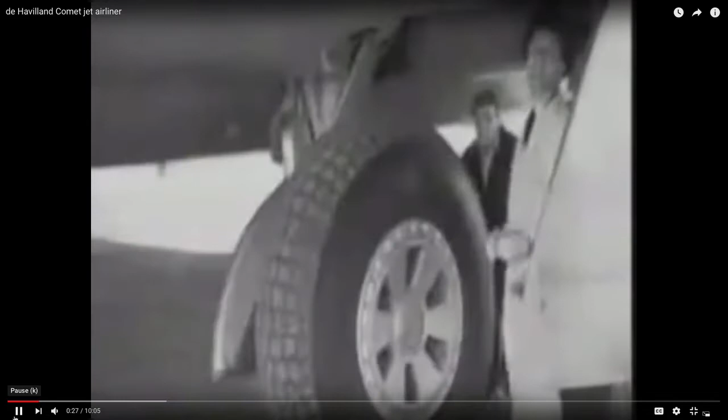Tails up for Britain.

With a comet scheduled by British Overseas Airways Corporation to start the world's first jet passenger air service, Pathé News detailed cameraman Sid Baines to cover the historic trip. This is his story.

A few minutes ago, I boarded the comet, together with other passengers making the trip to Johannesburg. Captain Philip Brentnell took us off, with Flying Officer Charbois, known to everybody as Charlie Boy, as co-pilot.

Up to 40,000 feet we shot, to reach the comet's best operating height, and headed for Rome, our first scheduled stop. Then I began to realize what a wonderful ship this was. Like all newsreel cameramen, flying is no novelty to me, but this was something new. There just wasn't any vibration.

Before I'd really settled down, we were flying over the Alps. I think I got a shot of the Matterhorn over there. Skipper Brentnell pointed out Corsica, that large mass of land 70 miles away.

At our great flying speed, we were soon on the last few miles to Rome. In a few minutes, Peter Panario was asking permission to land. We were over Rome. There was an hour's refueling break scheduled.

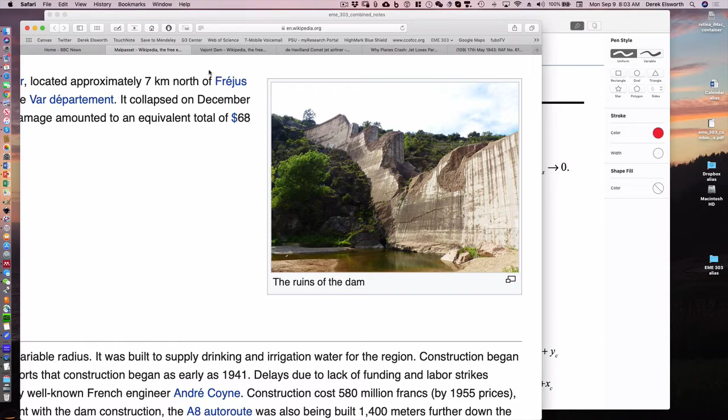We talked last time also about the Malpasset Dam, about pressures behind a thin structure, not unlike the thin structure of an airplane shell, that when it was filled, it moved the abutments and the dam itself broke. And I mentioned, but not in great detail, another event that occurred a few years later in the early 1960s, the Vaiont Dam in the Italian Alps.

Still stands there today, completely intact, but in that particular case, a rainstorm—there was a landslide that was sitting above the dam, and over time, with rainfall, the water level rose within the slope, and the slope slid into the dam.

So like pouring a bunch of rocks, putting a brick into a bucket of water, the contents of the dam flew over the top of the dam, and there was enough volume to displace the fluid that it flooded the valley and killed a thousand or so, a few thousand people as it went down there.

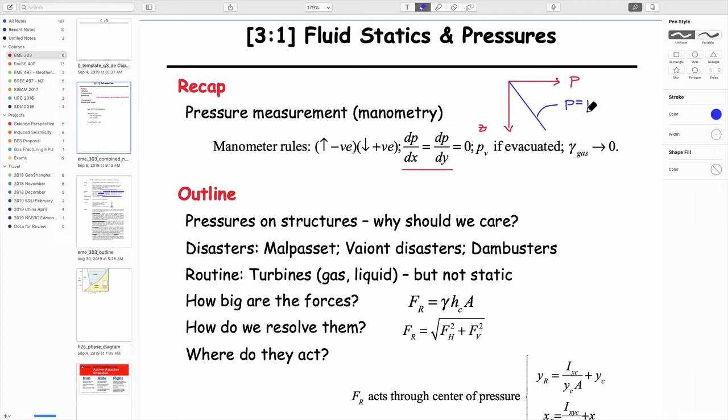We've been talking about pressures at a point, and the main rules we've applied so far come from the idea that in our coordinate system, with pressures and locations, depending on whether we have a liquid, we get something that looks like pressure equals some expression like this. And if it's a compressible fluid, it might look different, it won't be straight.

So it might look alternatively like something like this. The point is that if you look at the shape of this curve, both curves, it's true at any point that the change in pressure with elevation equals, using the sign convention with negative z downwards and positive z upwards, the pressure distribution always conforms to this at a point. But depending on how the density varies along the length, for a liquid it might look like this, and for gas, which is compressible, it isn't necessarily a straight line.

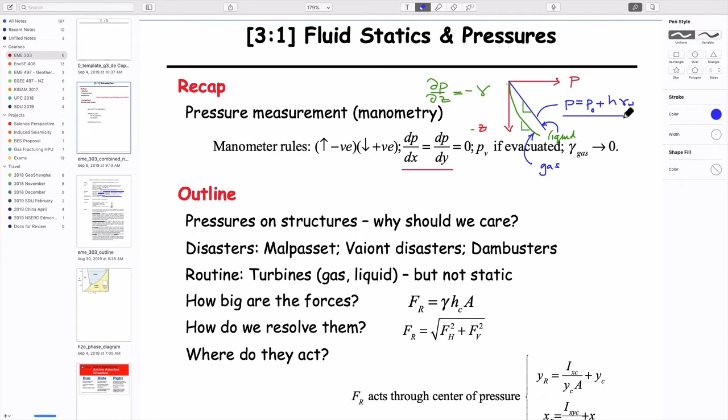So we can use this expression, the one we really use to look at the behaviors today. But what we want to do is look at pressures actually applied on a structure. The things we'd want to understand are how big those forces are, how we resolve them from multiple forces into some useful force that tells us something about how they might behave. So we're interested in how big the forces are, where they act particularly, and the third thing, which isn't on here but I'll add, is what is the failure mode.

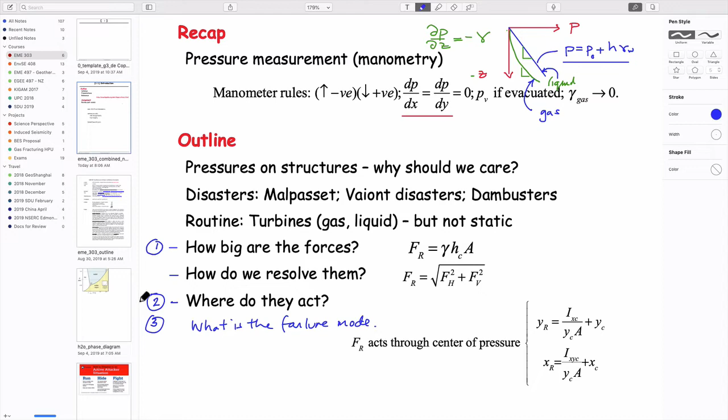Which will become clear soon enough. How do we use it to say whether the dam will topple over or not? Is there a way to do it? These are three separate things we'd like to be able to do.

So maybe to illustrate it, it'll be useful to look at this example of the comet and what that might look like. Let me do that. Whoops, see if I can move that. Does it move? No, it doesn't move. Fine, I'll just go back to doing my usual thing. So if we take the example we just looked at, where we have inside this, don't want that, thank you, go away. Is that what I need to do now? I guess that's what I need to do, isn't it? It gets very complicated when things don't quite work out the way you want.

So we have this aircraft fuselage, which has inside it a cabin pressure, and outside it has atmospheric pressure. We said before what we think these are: cabin pressure should be something like 100 kPa. We also looked at the change in pressure as you go up in the column, at 10,000 meters the pressure was something like 20 kPa. I think we did that last week.

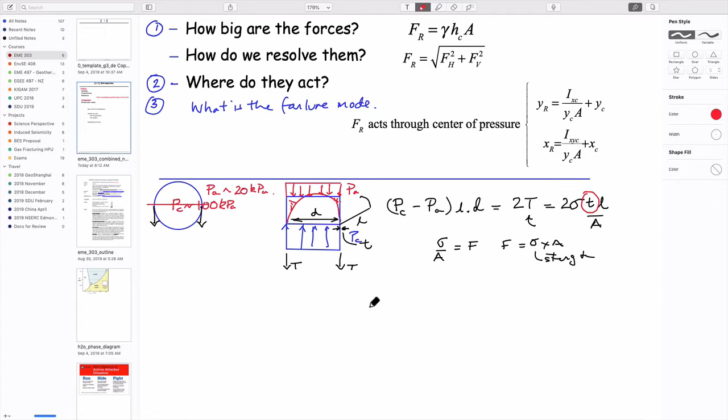So now we have enough to solve it. We could figure out, for instance, if you're designing something, what thickness aluminum you'd want to apply. So if we rearrange this for the things we know - length, diameter - and divide both sides by 2 times the strength times the length, that should be equal to thickness.

If we put some numbers in for what we know, writing in longhand: 100 minus 20, times 10 to the 3 newtons per meter squared, because these are kilopascals. The lengths cancel out. The diameter is equal to, say, 10 meters. Divide through by 2 times the strength of aluminum, which is about 200 megapascals.

So if that's right, and if we look at what these are, then the thickness we need works out. This is newtons per meter squared as well, in terms of length. So this is the same as 80 times 10, which is 800 times 10 to the 3, over 200 - I missed out a 2 - 400 times 10 to the 6, and it's meters. So T is something like 2 millimeters, or 2 times 10 to the minus 3 meters.

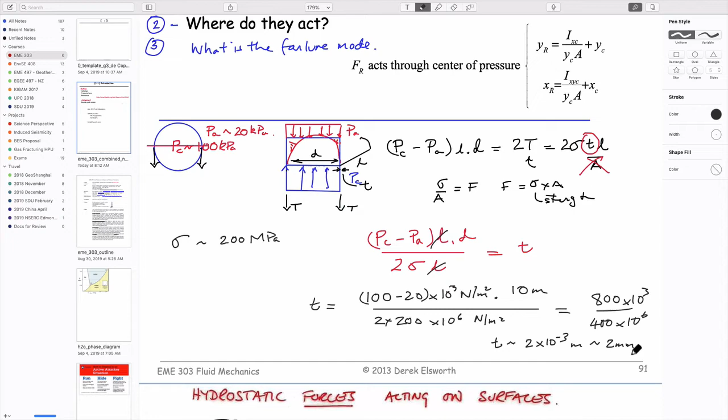Sounds about right - sounds like a reasonable thickness for a skin on an aircraft. You know it's not a meter thick, and you know it's not the thickness of tin foil, so 2 millimeters is about right.

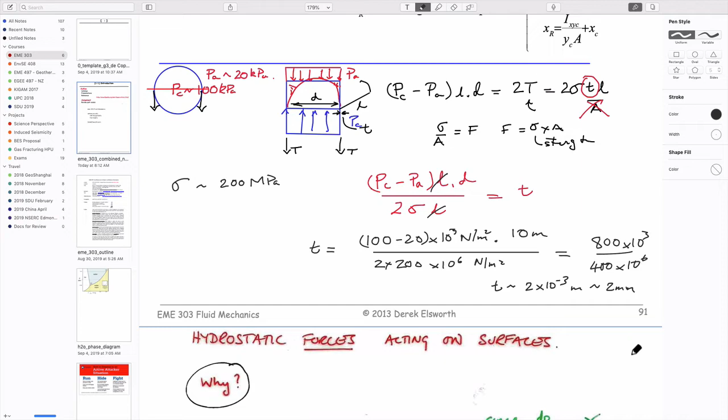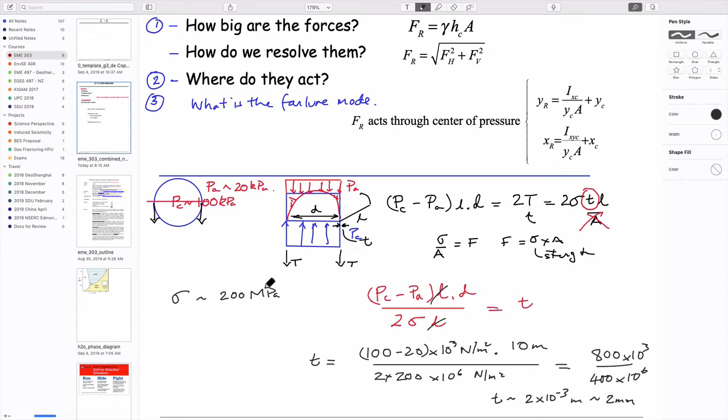So we've done some of the things we talked about. We said we'd do 3 things: how big are the forces? We've defined forces here by multiplying pressures over areas, very simply. We haven't figured out where they act, and we haven't resolved them vertically - we haven't needed to. If we looked at the geometry, we'd find the place where this big blue force acts would actually be right in the middle of the plane, through the center, but we don't know that yet. We've defined a failure mode that says when the stress gets bigger than this strength, it will fall apart.

That's basically what we're attempting to do today. We'll use something a bit more sophisticated than that, but in the same order: we'll try to work out a generic way to figure out how big the forces are, and we'd like to generically figure out exactly where they act. Then, if you know the force acting on a structure, you can figure out how it might fail - you have to define the mode of failure to go that next step. So that's our plan for today, and we'll try working on that first.

How much comes off here? All right, so I'm going to - you can tell me if I go off the edge of the plot. For some reason I like red more than anything else. So we'll talk about pressures on structures.

Okay, so I should know that anything on the other side of this isn't going to work out so well, just from this projection, okay?

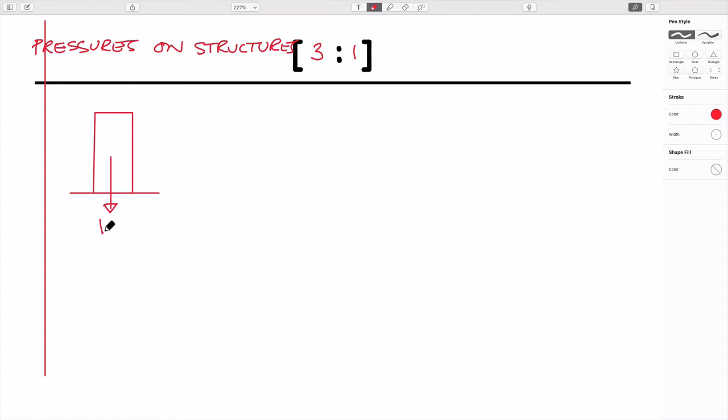Let's take the example we talked about for the dam. The idea is that you might have a structure that sits on a base. It's not a very good representation of the arch dams we talked about. This structure would have some weight attached to it, just from the mass of concrete sitting on its back.

The question is that we know pressures change with depth, and at least for liquids, pressure equals unit weight times z plus P0. If we start at 0, we can get rid of that term and use this generically. Let's relax the assumption that this should be negative z, just use it as positive for now, and take that as being the case. Then, in the same way we drew a free body diagram for the plane fuselage, we can do the same thing here.

If we look at drawing this out as a three-dimensional structure, we know it will go into the page by some amount. This would be the width of the dam, etc. And this pressure distribution would be going into the page as well. So you get the picture.

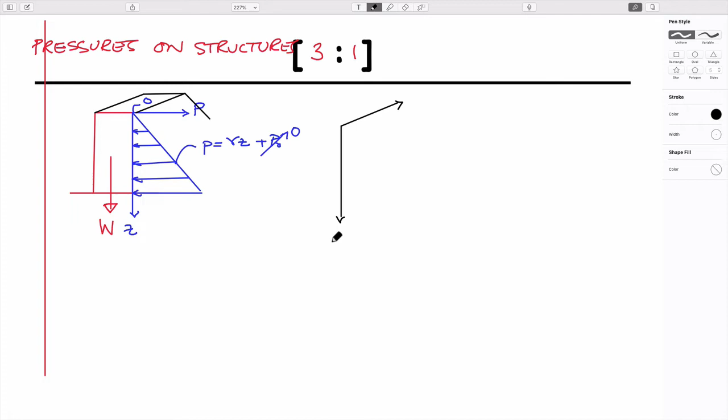So what we could do is use a representation of this, where we'll relax the requirement that z should be positive upwards for now. What we're going to do is take the area of this particular structure. If we call this some width across here, and we'll call this some increment dz, then the area of this piece is just equal to the width times dz, which is just equal to an area, dA, change in area.

What we'd like to do, to get the magnitude of the equivalent resultant force that acts here due to this distribution of fluid, is write the magnitude of this force as being equal to the pressure multiplied by the area, the sum of incremental pressures times the area, which we can write as an integral.

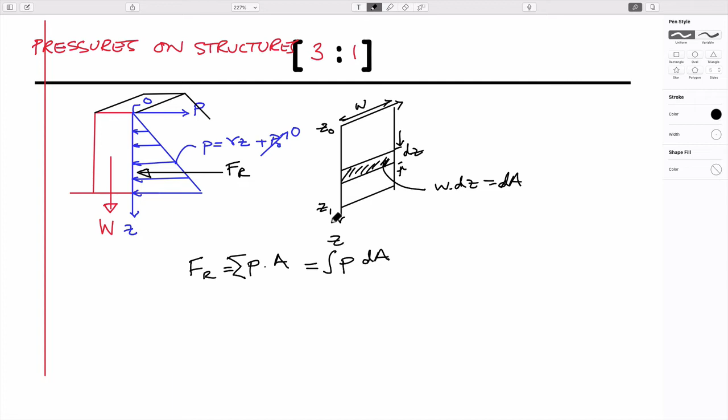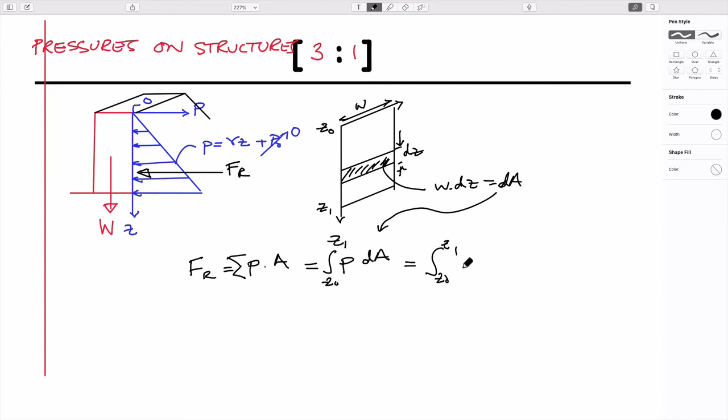That integral should be from z0 to z1 at these points right here - this would be z1 and this would be z0. So if we put that in, we get an integral from z0 to z1 of the pressure multiplied by the width times dz.

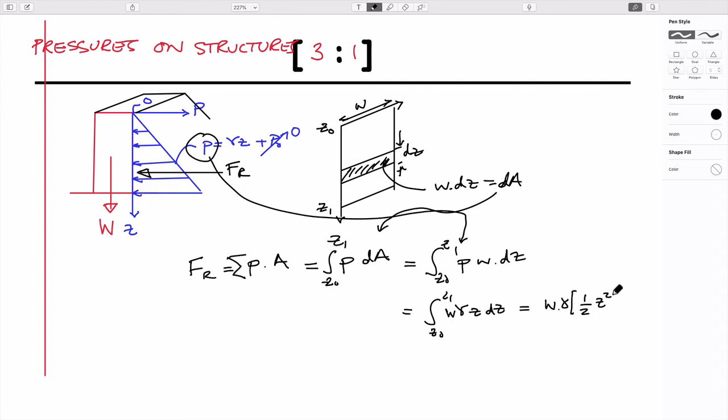We also know the pressure, so this becomes the integral from z0 to z1 of the unit weight of fluid times width times z dz, which is the same as width times unit weight times a half z squared, evaluated between these two limits.

We have a final force which we can write as a half unit weight times width times z1 squared, since z0 is 0, which is also the same as a half unit weight, width times z1, times z1. The utility of writing it that way is that this term here is actually the area of this whole feature.

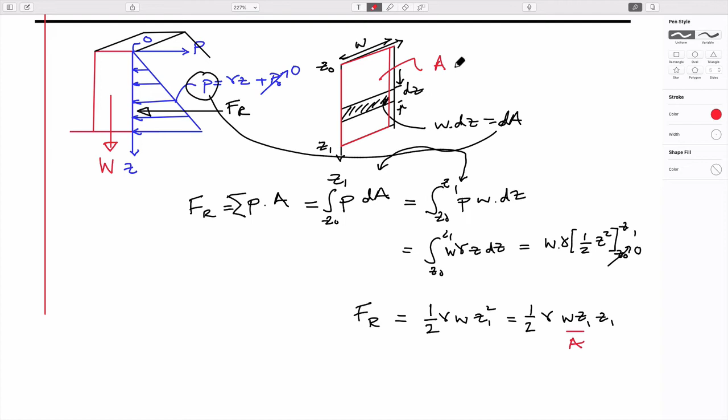So area is equal to width times z1 minus z0, but we've set z0 as nothing. This is actually a standard result we can use: the force acting on the system is equal to the unit weight of the fluid, times the area of the plate, multiplied by the depth of the centroid. In this particular case, this depth is a half z1 for us.

This is what we call the depth of the centroid of the area, the area of the plate that we're interested in. The centroid, of course, is the balance point. So this is the plane we have on the back of the dam.

And so if we were to try and support that - just like Pennsylvania, where State College is, equally inaccessible to all in the state, you take the state and draw an X between the northwest and southeast corners, etc. That's where State College is.

The centroid of the plate, representing the back of the dam, is the balance point. To calculate the magnitude of the pressure force acting on this surface, we need to figure out where the center of the plate is, and get the depth of the fluid at that point, h sub c, which is half of z1 here. The depth of this centroid point will always give us the magnitude of the force acting on a plane surface.

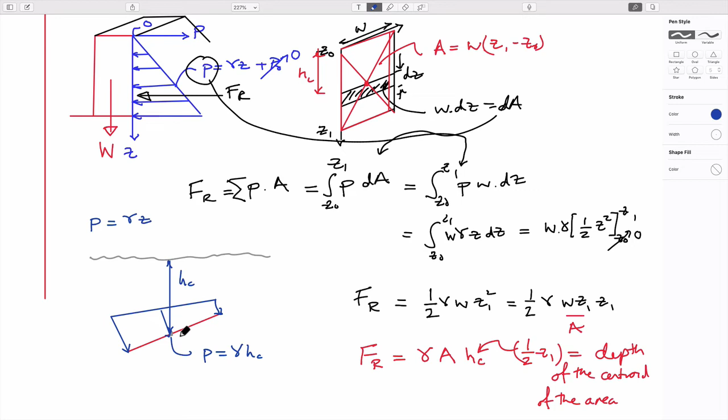We know pressure equals unit weight times z, and z varies linearly as we go down, so the pressure distribution is also linear. If you draw the pressure as constant at the magnitude P equals unit weight times h sub c, then to turn that blue distribution into the actual green distribution, you just take the triangle off here and put it there - they exactly balance each other. That's the physical, geometric reason why the mean or average pressure acting on a plate always acts at the centroid.

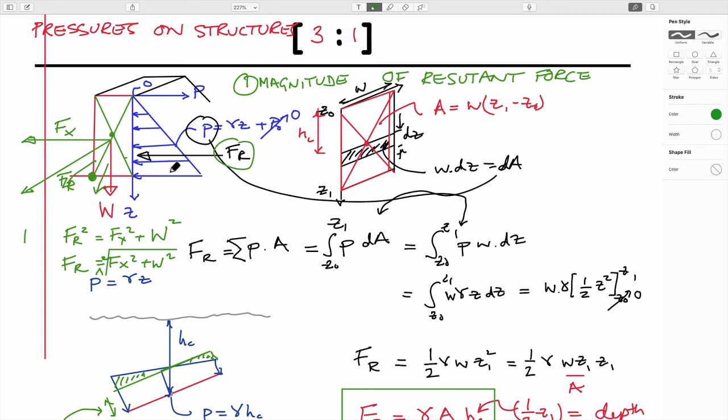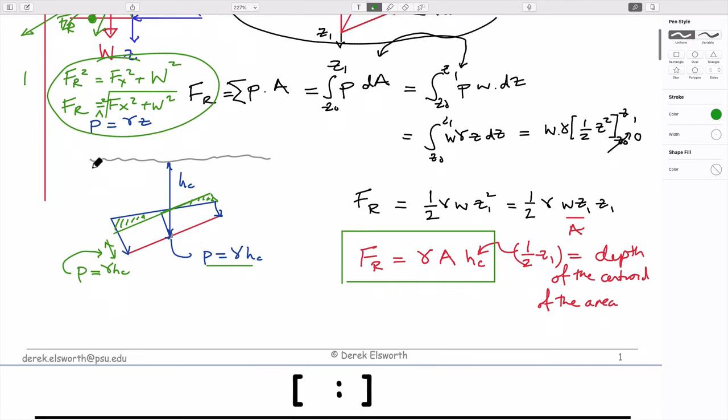So we said we wanted to do three main things. Magnitude of the force, done that - we've got an expression at the bottom of this page. We want to be able to take the resultants of that - that was the second one, and we've done that with this expression here. The third one is to be able to calculate where they act. So that's our next job, to figure out exactly where those forces would act. This is to talk about the point of action.

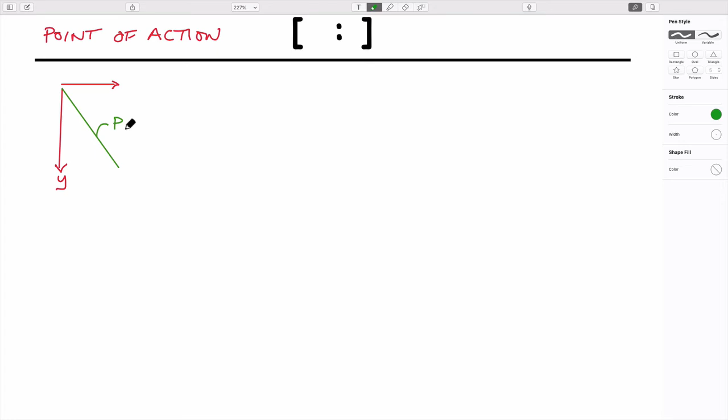So we'll use the same geometry that we had before. Let's call this Y now, just because the book uses the same terminology, and it's useful for us to be able to do that. And if we go down here, we know that P is equal to gamma Y in this case, and we know that this is the pressure distribution that we had before.

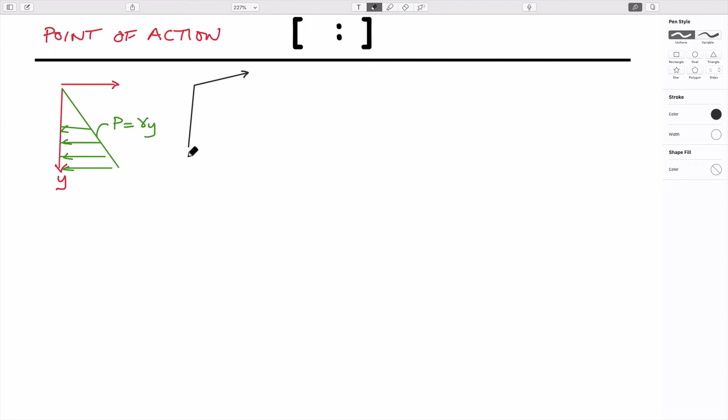Again, we're going to have this geometry with the plate, if you like, that looks like this. It's again going to have some little incremental depth, which will be dy, y0, y1. It'll have some width attached to it, in the x direction on the surface. This little area here is going to be dA equals width times dy.

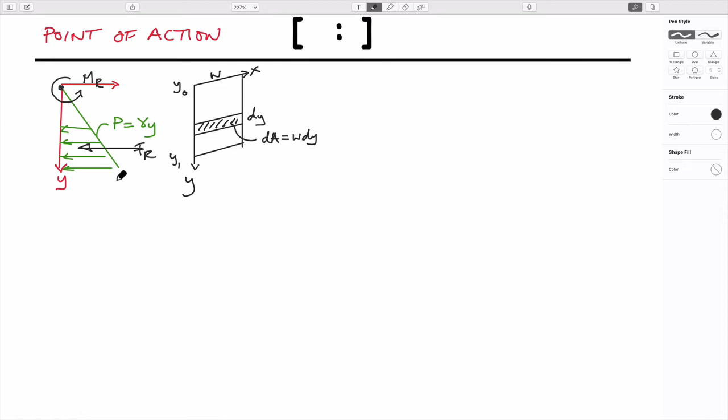And we're going to realize that we could take a moment around any point, but specifically, we could take a moment around this point. What we'd like to do is balance the moment that comes from this green distribution, incrementally defined, with the moment that comes from balancing this length here, which we'll call YR, and the force which we know how to get because we have an expression for that.

So what we can do is equate the moment around this point here - or it could be any point, it's just a convenient point at the top - with that due to the resultant force and the location where it acts. We don't know where it acts yet, but we'd like to find that out. We'd like to know what YR is, but we can get this moment by incrementally summing the moments around here, and we know this, so if we do that, we can get YR.

So that's our task. We can write the fact that the sum of the moments is equal to this force times the lever arm which it acts through. The big force represents the integrated effect of this green distribution multiplied by its unknown lever arm, which has to equal the moment that is applied. So we could rewrite this as YR equals the moment divided by the force. Then, to get this, we have this from the previous page. We need to figure out what the moment is.

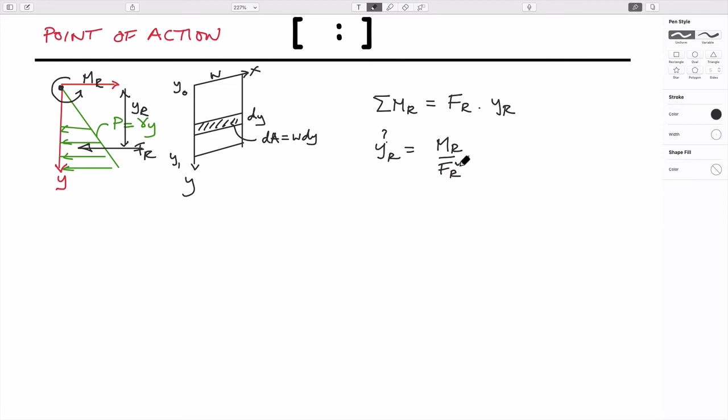So let's figure that out. YR is equal to one over the force resultant times the moment. And the moment is going to be equal to the force times its lever arm. The force for our particular case is going to be the pressure at a point multiplied by the area, which is W dy. So this term here is just an area times the pressure, which is a force. And the lever arm is going to be equal to this distance here, which is y.

So if we write that out in longhand, it'd be the summation of the pressure times the width times dy times y. The pressure we can also define as something else, right? The unit weight of fluid times y. And so if we write this out, instead of doing a summation, we'll get a bit smarter between y0 and y1.

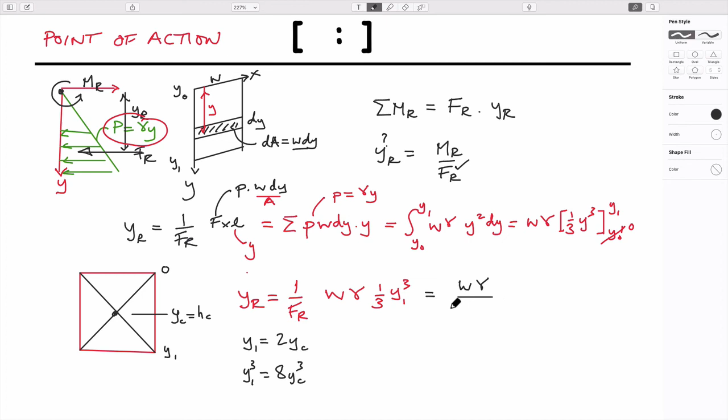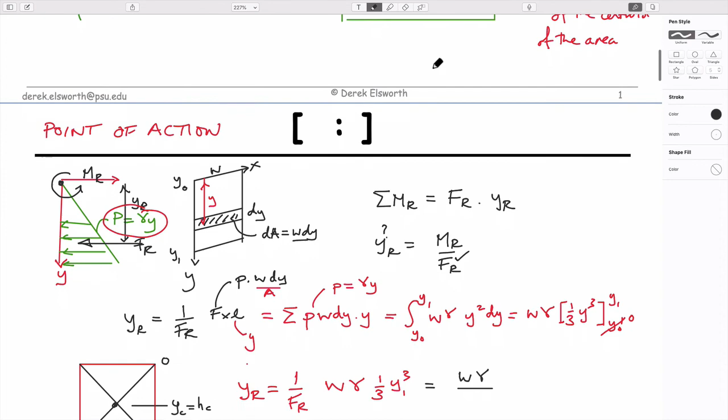And so the reason for doing that is that we can write this out in longhand as the width times the unit weight divided by FR. FR is equal to the unit weight times the width times yc. So this is going to be equal to the unit weight multiplied by the area, which is the width, times 2yc. And this is going to be equal to yc also, right? This is the depth of the centroid. So this whole term on the bottom is just equal to FR. And we have left on the top one over 3 y1 cubed, which is equal to this.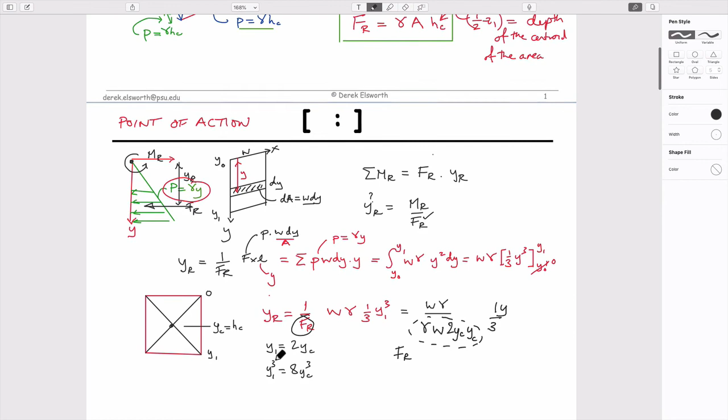So let's separate that out. So now, see if I can do this without messing it up. So we have width, unit weight, times 2yc squared, and we have 3 times y1 cubed, which is the same as 8yc cubed.

So if we go through this and get rid of the terms that we don't need - how are we doing for time? We're doing okay for time. Get rid of the widths, get rid of the unit weights. We end up with the result that YR is equal to 8 over 6 times yc. Oh, that was actually quite easy. And that actually is the right result.

I surprised myself. And which we could also write as being equal to, because of this relationship here, 8 over 6, which is the same as 4 over 3, yc. And if we account for this observation here, that yc is equal to y1 over 2, then we end up with the magnitude of 2 over 3 y1. So that is not a standard result. We'll be able to convert it into a standard result next time, but it's a result that's specific for this specific geometry.

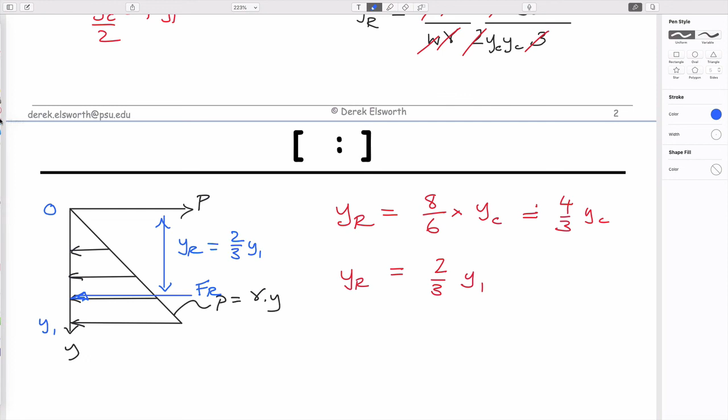And it's not a standard result if the plane is inclined, but we can turn it into one quite easily. So the point of all this is that, from the three things we said we wanted to do at the beginning of today, I'll just go back to show them.

We said we wanted to do three things. We wanted to figure out how big these forces are. Fr, we know how to do it. We just integrate over an area. There are some standard results, and the standard result is that if we have an area...

Because we know that Fr is equal to hc gamma times area, and this term here is just pressure at that point, the centroid. So we can get it either way. We have a standard result that gives us the force that acts on a plate, any plate we have, any depth, any orientation, standard result.

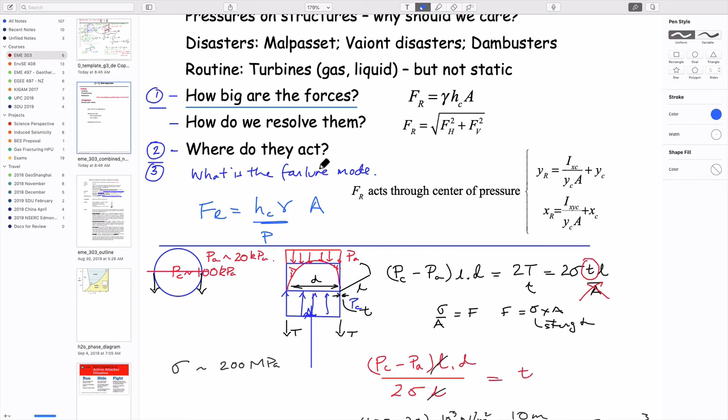We know if we have other forces we can resolve them. We can calculate where they act if we take moments around it. We've done it only specifically for a particular geometry, a plate that's vertical and intersects the surface, giving this triangular distribution. If we do that, the location of the point of action as a standard result is 2/3 of the way down the plate.

I'm never sure whether I should do this or whether it confuses people, but I think it's a nice demonstration, so you can draw your own conclusions. The magnitude of this 2/3 -- if you look at the pressure acting against this wall, it's a triangular distribution. The 2/3 point down is actually the balance point of a triangle around its point, so the centroid of a triangle.

So in here somewhere, the centroid of this pressure distribution would be a third of the way up, a third of the way from the base, so around here. This is the point where the centroid of the pressure distribution is, the location where the pressure acts through the system. I'm always hesitant to mention this because people get confused with the centroid of the plate, where you measure the depth below the surface to get the force Fr. But a physical representation of this 2/3 depth standard result for triangular distribution is that it's the balance point for the pressure distribution.